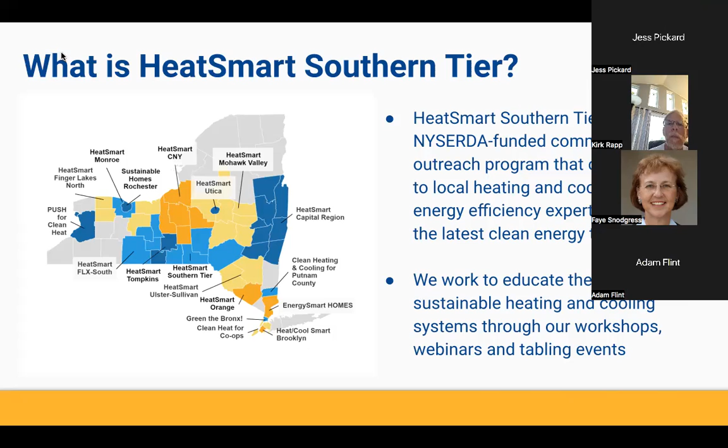So first off, what is HeatSmart Southern Tier? This is one of several NYSERDA campaigns that connects the public with local experts who offer clean energy technologies. NYSERDA is supporting communities across New York State in implementing community-based outreach and education programs for clean heating and cooling. HeatSmart Southern Tier specifically works to educate the local community on sustainable heating and cooling through webinars like this and tabling events. As you can see at the bottom of this map, HeatSmart Southern Tier operates in Broome, Tioga, Chenango, and Delaware counties.

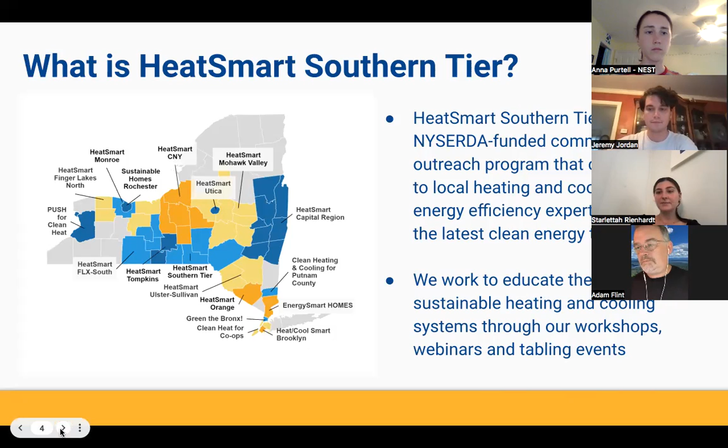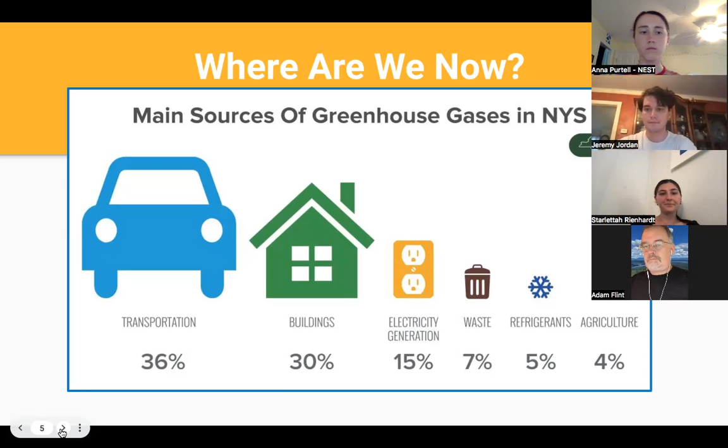Some of the biggest draws to participating in the HeatSmart Southern Tier program are the individual benefits, such as reducing your energy costs and increasing your home comfort and safety. Some broader benefits include reducing greenhouse gas emissions and raising awareness about the importance of clean energy. You can also make a positive contribution to Endicott's Clean Energy Communities campaign by participating in HeatSmart.

Here at NEST, we work with different municipalities across the Southern Tier on becoming clean energy communities. This is a program that's run by NYSERDA and incentivizes municipalities to make clean energy and other sustainable improvements. Communities can earn points with each action that they take, which add up to awards such as grant money. The Village of Endicott is a participating municipality in this program, and you can help contribute with HeatSmart.

Oh, you can go to the next slide.

By getting energy efficiency improvements on your home through this program, Endicott will earn various points towards awards.

The technologies that we promote mainly deal with weatherization and heat pumps. The goal of weatherization, such as insulation and air sealing, is to protect your home from the outside elements in order to maximize energy efficiency. Heat pumps are technologies that provide renewable and efficient energy that you can use for heating and cooling your home. The kinds that our program focuses on are ground source, air source, and heat pump water heaters.

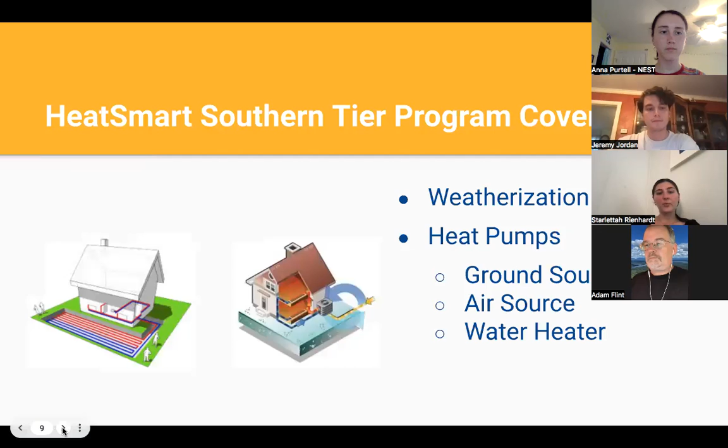So now I will quickly introduce our installer partners. HeatSmart Southern Tier partners with competitively selected and NYSERDA approved installers to implement the technologies that I just mentioned. For air source heat pumps, we partner with Air Source LLC and NP Environmental. For ground source heat pumps, we partner with Daily Geothermal and NP Environmental once again. And for home performance and efficiency, we partner with the Insulation Man.

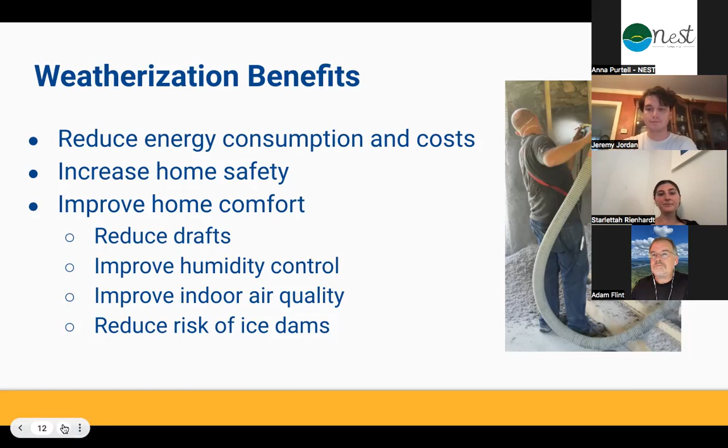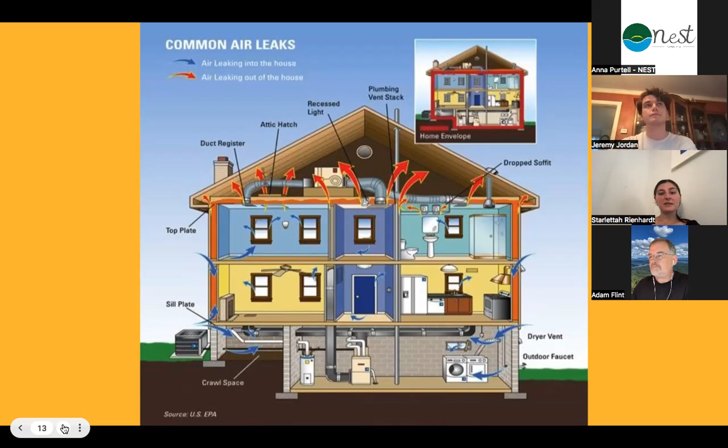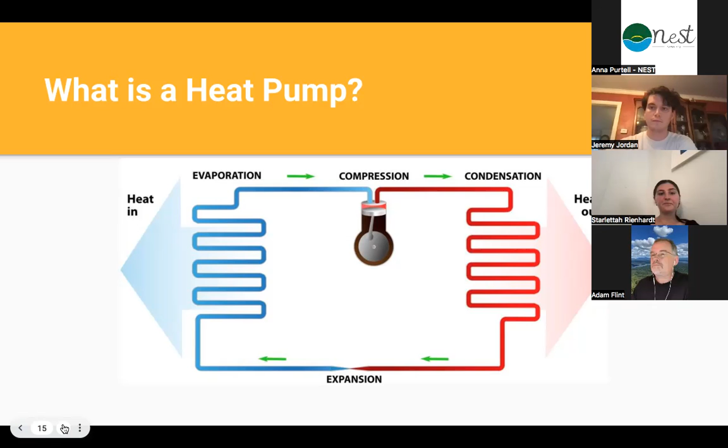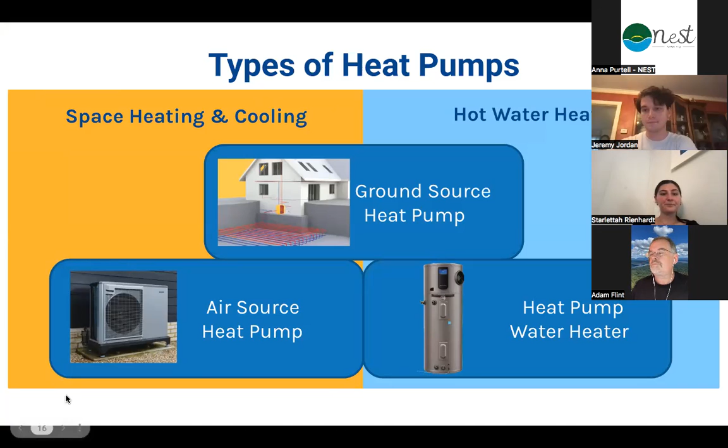There are 3 types of heat pumps that we'll be covering tonight: ground source, air source, and water heaters. Ground source heat pumps, as well as heat pump water heaters, can be used to heat domestic hot water. Ground source heat pumps are also known as geothermal. About 6 feet below the ground is a very stable temperature, and geothermal systems circulate fluid in pipes below the ground that transfers the warm energy from the ground into this fluid. Heat is then concentrated through electricity and compression and then circulated through your home. During the warmer months, it works in reverse, transferring the warm air in your home back into the ground.

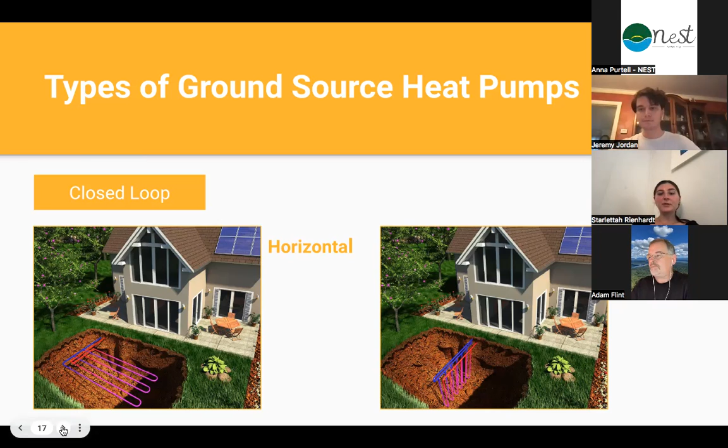There are many benefits of ground source heat pumps, including the positive effect on the environment, your energy bill, and your home. The system is very efficient in heating and cooling, which means lower energy bills. It's long lasting and it removes fossil fuels from your home. You can also heat hot water in addition to your home.

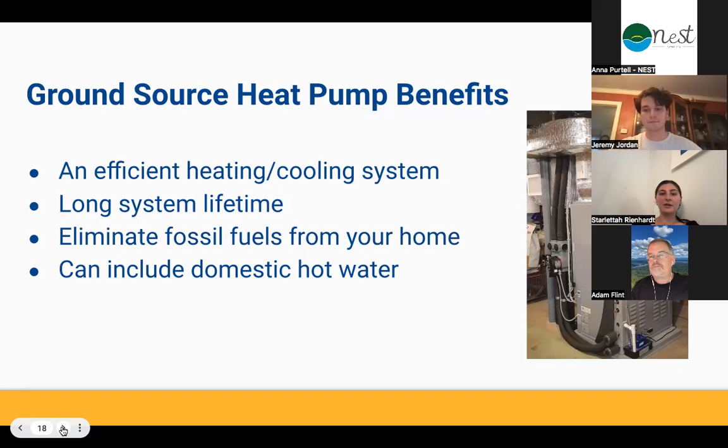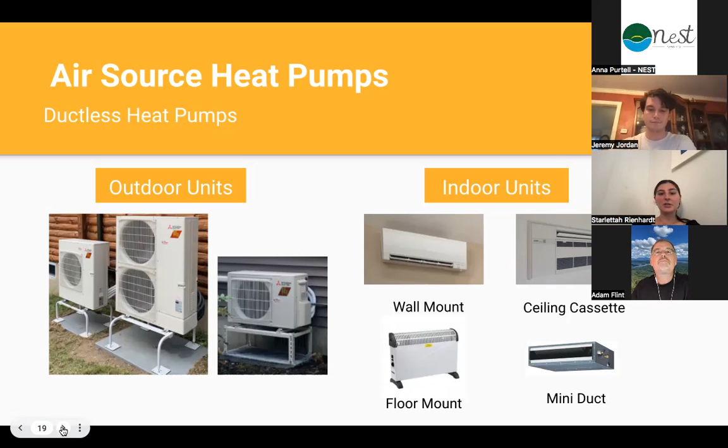The other type of heat pumps are air source heat pumps, which work similarly to ground source, but they take heat from the air and pump it into your home. These are usually a ductless system and do not require underground pipes like the ground source heat pumps. This allows for quick and easy installation. Air source systems consist of one outdoor unit, which is linked to one or more units inside your home. These units come in various styles, as you can see above, to fit different aesthetics and cost preferences. They operate similarly to an air conditioning unit, however, they run in reverse as well to provide heat.

Similar to ground source heat pumps, air source heat pumps allow for energy savings. Air source heat pumps are also very flexible because you do not need to replace your entire heating system if you don't want to. Allowing for zone control in your home, you can get just 1 or 2 heat pumps and use them for a couple of rooms.

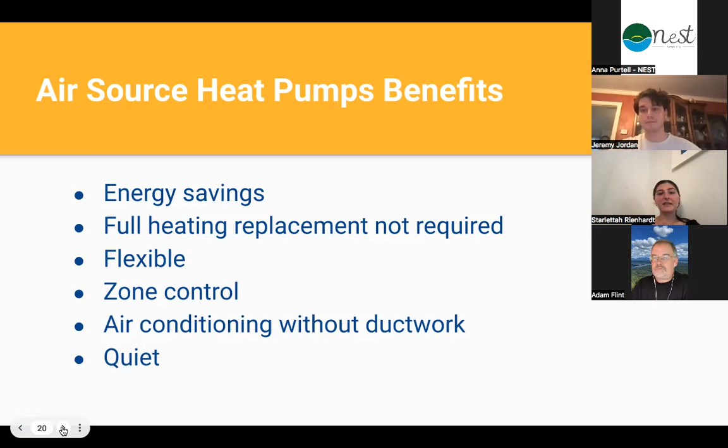This can allow you to have air conditioning without ductwork and to maintain different temperatures in the different rooms of your home. You can also get a full heating system replacement if you would like, but it's not necessary. Lastly, these heat pumps are known to be very quiet.

Now, the last technology that we'll cover tonight are heat pump water heaters. The heat pump technology that we've been discussing can also be used to heat water. Heat pump water heaters are basically an electric water heater with an air source heat pump on top. They use indoor air to heat the water and usually have a backup system to meet high demands.

Similarly to heat pumps, the main benefit of using this kind of system is higher efficiency. While a typical electric water heater uses electricity to heat water, a heat pump water heater uses hot air that is already around the unit to heat the water, which reduces the amount of electricity that is needed for heating. Heat pump water heaters also provide dehumidification benefits.

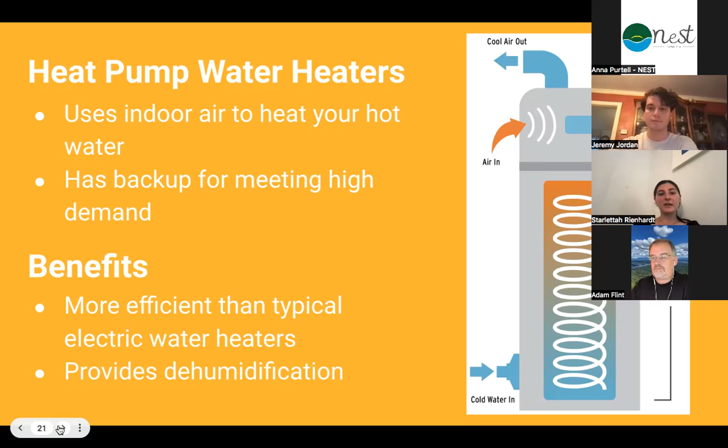And now I will pass it along to Jeremy to take us through the incentives and financing. Hi, everyone. My name is Jeremy. In this part of the presentation, I'll be going over the incentives and financing options that are available to you when you start a HeatSmart project.

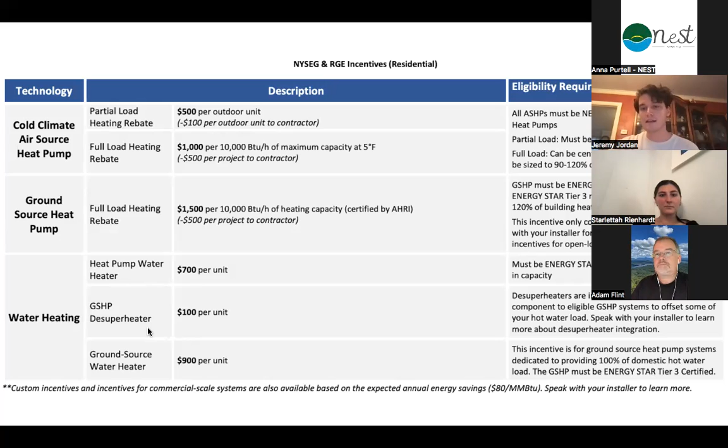Some relevant information to understand is that incentives generally vary based on the size of your home and the size of your project. There are also tax credits available to you in addition to the previously mentioned rebates. Thanks to the recent passing of the Inflation Reduction Act, the federal tax credit for ground source heat pumps was increased from 26% to 30%, and the $300 air source heat pump federal tax credit was restored. There is also a $300 tax credit for heat pump water heaters.

And in addition to that, New York State recently implemented a new tax credit for ground source heat pumps of 25%, up to $5,000 of installation costs. There are also many financing options when it comes to these projects. NYSERDA offers 3 different loan options. The first is a Smart Energy Loan, which you are qualified for up to $25,000 in terms of either 5, 10, or 15 years, with an interest rate of 3.49 or 6.99%.

Another option is the On-Bill Recovery Loan, which has the exact same conditions as the Smart Energy Loan, except it's paid on your utility bill over time. Lastly, there is the companion loan of $25,000 in terms of 5, 10, or 15 years under 7% interest. And this loan can be added onto one of the previous 2 loans if you need extra funding or if you have a larger project.

A couple of other options can be financing through a specific heat pump manufacturer or securing a loan through your local bank if you get more competitive interest rates. I should also mention that the interest rates offered are dependent on your income, so people with lower income will be able to receive lower interest rates. Our installer partners also have 0 interest loans on a time-limited period, which they'll be able to tell you more about as you move forward with the process.

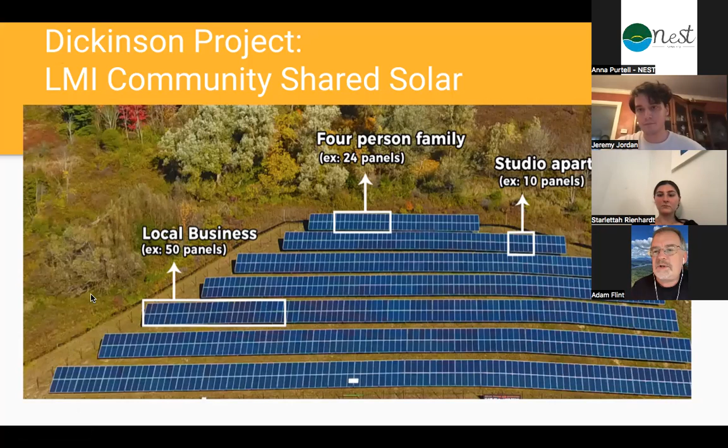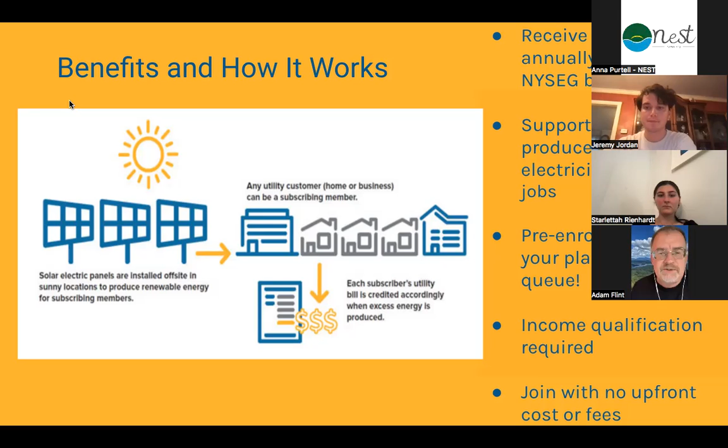So the basic way in which community solar works is that an array, a larger array like the one you saw in the previous slide, has a certain amount of power that's generated over the course of a year. And depending on how much electricity you use in the course of a year based on your NYSEG bill, the developer will calculate what they need to allocate month to month onto that bill. And so the net result of that is a 20% saving.

So you're not actually receiving any of the electrons coming from that array. It's purely a financial arrangement. And the utility does the crediting on the bill, so there's no separate billing. This has a number of different benefits in addition to saving on electricity. The developer we work with, Citizens Energy Corporation, is a union shop, and the lead contractor that they select will be hiring from union locals, IBEW, and laborers and so forth in this area.

And in addition, you can benefit the person who's actually owning the land. And this developer is also going to be putting in pollinators rather than grass, so there'll be some environmental benefit. We anticipate that this array will be generating electricity next spring. And because this discount is deeper than any other projects available in NYSEG territory, or frankly anywhere upstate, we anticipate a lot of demand.